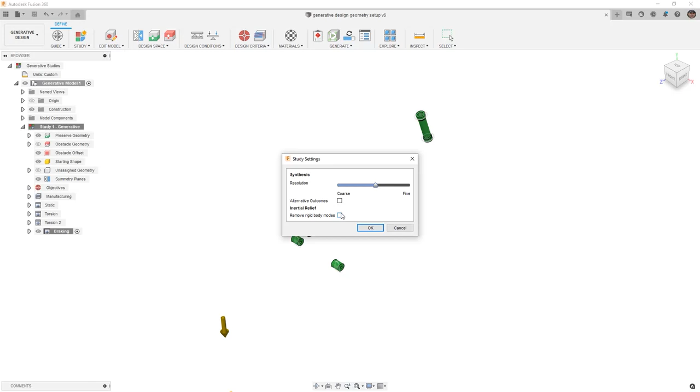In this case, I'm going to set the mesh resolution about 50%, and note that we have a couple options. We have alternative outcomes and remove rigid body modes. The alternative outcomes was part of that preview functionality, which we can include. In our case, I'm not going to include that, and the inertial relief is not needed in this case because we have completely fixed the frame and we're loading the front and the rear suspension. But those additional options can help us depending on what geometry we're trying to define.

The next thing that we need to do is take a look at our design space. While we didn't include a starting shape, it can oftentimes be extremely helpful to have a starting shape to define the build volume. There are certain instances where a design requires a starting shape. In cases where some of our preserved geometry is completely obscured by obstacles, it might require a starting shape in order for us to actually get a solution.

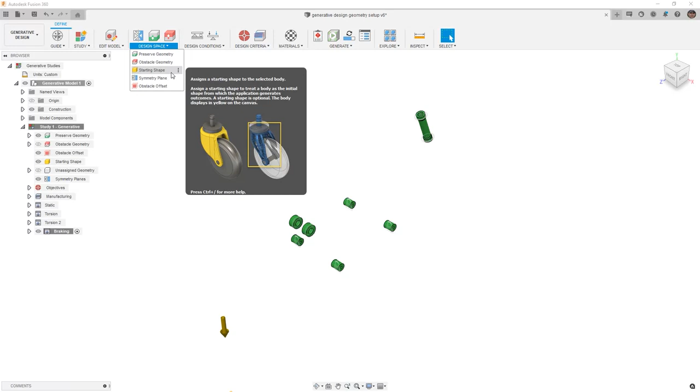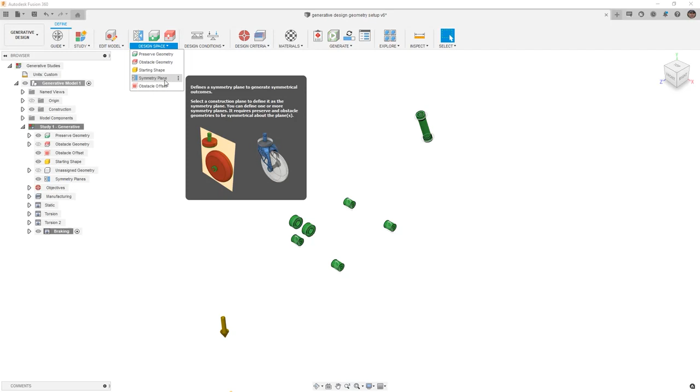Symmetry plane can be extremely helpful, and in our case, because we do have somewhat of a symmetric geometry, we could use a symmetry plane. There is one potential problem here in the fact that the frame mounting lugs are actually not symmetric to the midline of the motorcycle. So for our example, we're not going to be using symmetry plane, but it is extremely helpful in some cases. The other option we have is something called obstacle offset.

Now, in some cases, the obstacles we define are exactly the size of the things we're trying to avoid. In other cases, we might want to make them a little bit larger. Even though we have obstacles, it is not uncommon for the generative design solution to build into those obstacles, and then once a design is created, they'll be removed. So if that's the case, oftentimes it's helpful for us to extend the size of our obstacles.

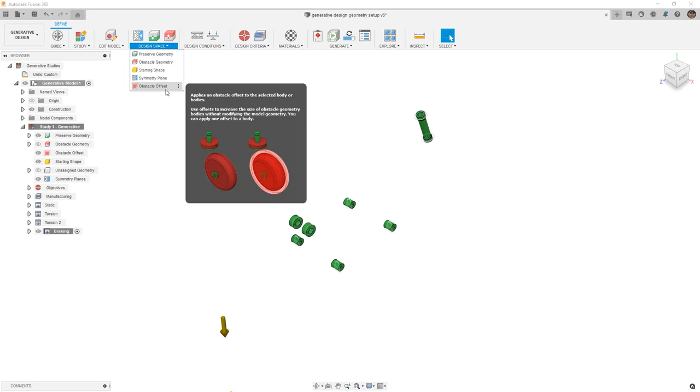In our case, our obstacles are so general and generic for the gas tank and the frame that we're really not looking at these tight or very specific areas. So we're going to leave this option off as well, but just note that it is extremely helpful in some cases. So now that we've explored the design space, as well as some of the design conditions for our loads and constraints, let's talk about the criteria.

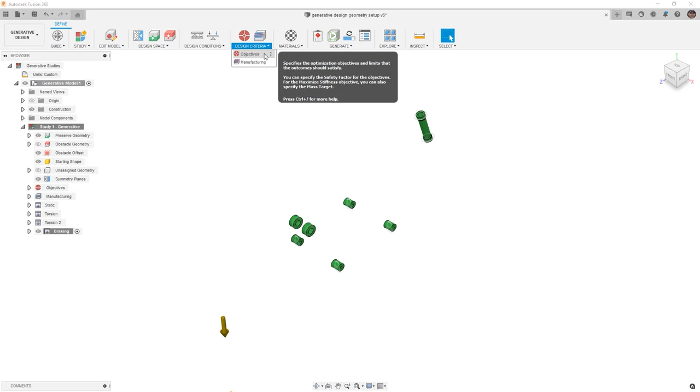There are two main things that we need to talk about with criteria, and in this video, we're going to focus on the objectives, and we'll cover manufacturing methods in another video. The objectives here are going to help us determine what condition means a convergence of our results. So when we have a generative design study, it's going to simulate each of our load cases for each material, each manufacturing method, and it's going to target our objectives and our limits.

So when we're looking at our objectives and our limits, we can look at minimizing the mass or maximizing the stiffness. Now, if we're going to maximize the stiffness, we can have a mass target. In our case, if we want a relatively light frame, we need to shoot for something that is a relatively small mass target, say 0.35 kilograms. When we're talking about the mass, that 0.35 kilograms, that is a relatively small and light frame, much lighter than anything that you would find on a production motorcycle.

The benefit of using generative design is that we can explore this as an option without having to design, validate, and redesign and revalidate over and over again until we get closer down to that iteration. What oftentimes happens with production parts is they'll make a generational change. They'll design a part that might be overbuilt, with a lot of extra mass, and in the next generation or evolution of that product, they'll begin to do what's called lightweighting. They'll begin removing some of that mass because they now have data that can support it.

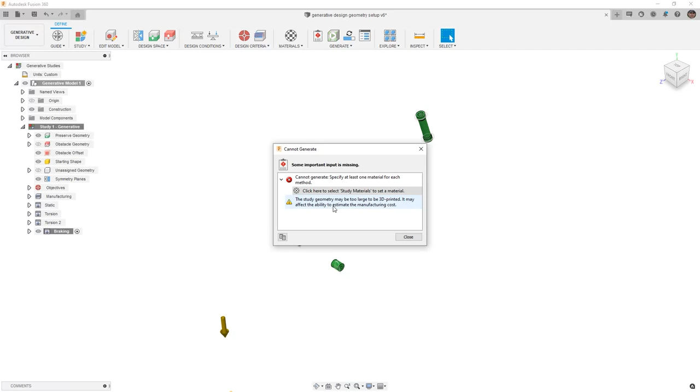We also have a buckling option. Once again, buckling, displacement, modal frequency—these are very specific types of objectives and limits. So for our example, we're going to use maximize stiffness, a safety factor of 2.0, and a mass target of 0.5 kilogram. Once we have those set, notice our pre-check is still telling us we don't have everything. Some of the default settings for manufacturing methods include 3D printing, which isn't really applicable for this motorcycle frame. Also note that we haven't gone in and talked about materials at all, so there's still a lot for us to set up and define.

Let's make sure that we save the design before we start to explore our materials. Once our design is saved, let's navigate to the materials section.

Even though we're skipping over manufacturing methods, I do want to talk about our study materials and the way in which we define them. Right now, the methods is set to all methods. The methods shown here are only going to be the ones included in our manufacturing methods, so currently, by default, unrestricted, additive, and milling are defined. What we can do here is set up materials specific to the manufacturing methods, or set them up for all methods in general.

When we take a look at the library section, we have the additive material library. It's important that we use the material library applicable to the manufacturing method we're going to use. That's important because there are materials in here, for example in the additive library, that are specific to the DMLS or metal manufacturing process. This also helps us understand which materials have cost estimation built in. Cost estimation is extremely helpful, especially for certain materials, but notice not everything has it.

For our example, we're going to go to the default Fusion 360 material library, and into metal. We want to explore this frame as an aluminum frame, but also as a steel frame. So we're going to drag that aluminum material up into the upper section of 'In This Study,' and then scroll down in our metal library until we get to our steel materials. When looking at these materials, the material properties or manufacturing methods used to strengthen them are going to be extremely important.

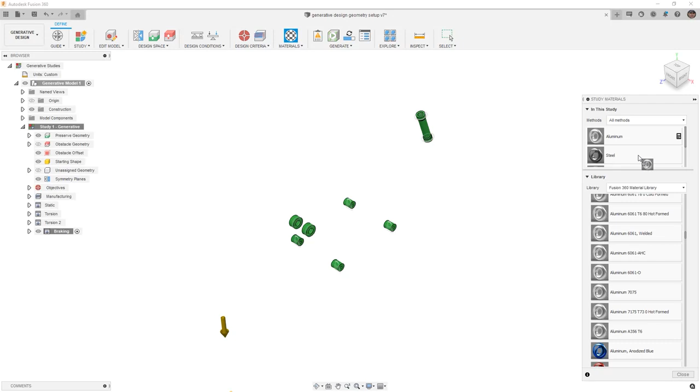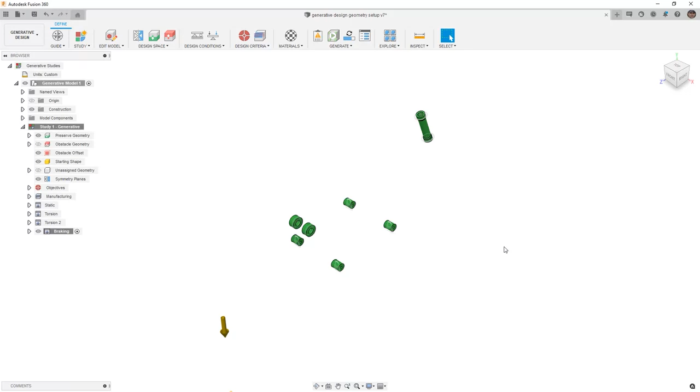It is important to note that there are limitations to the number of materials you can select. Currently, you can have at most 7 materials, but that's going to be over the entire generative design study. So if one of your manufacturing methods has 7 materials chosen, that's going to be problematic, so make sure you pick wisely. It's also important to note that the more materials you choose, the more results you'll get, but also the longer those calculations will take. At this point, let's make sure we save this design before moving on.